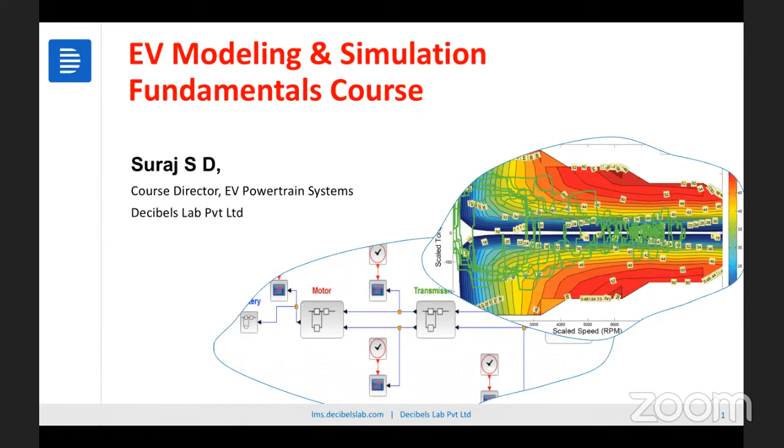Good evening everyone. Welcome to the session on EV modeling and simulation fundamentals, as a part of the 2 hours course today. It's a privilege to host all the people who joined here, and it's been a fantastic number of participants and registrations we have got for today's session - close to 1,600 people. Really impressed by the number of people who want to learn about EV systems seriously. And it's a pleasure for us from Decibels to host these free courses and bring our expertise and industry knowledge to share across these platforms. Thanks a lot for joining in, by the way.

Let's go ahead and start the session. So I will be the person, Suraj, your course director, and today's person who would be delivering the session on EV modeling and simulation.

This is the course flow we have for the session. We would start with the EV powertrain subsystems - covering what subsystems are in an electric vehicle. Why am I covering this if the session is about simulation? Because only when we know what subsystems are there does it become more meaningful to understand the simulation and its importance on these subsystems. That is why we'll have a discussion on powertrain subsystems for the first 15-20 minutes. I think people who have participated in past webinars may have already learned these things, but we want to bring everybody onto the same platform as we go ahead with the discussions and simulations.

Then we jump into why we perform simulations. I'll go deeper in showcasing a few of the areas of powertrain sizing calculations, and also the influence of certain parameters such as motors, drive cycle, vehicle weight, and so many other parameters, plus parameters such as atmosphere and how it influences the simulation, and why we need to do a simulation to do the sizing of components and things like that.

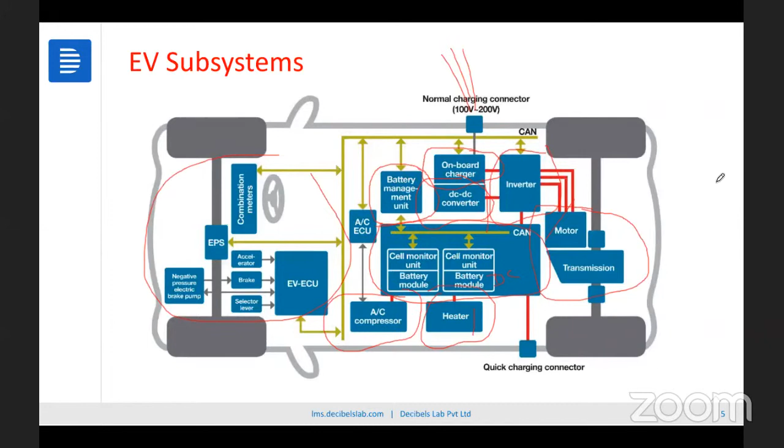Right, so a few more questions. What is optimal temperature? Okay, let's go ahead to the next part of the discussion. I'll definitely touch base on the questions which I'm possibly not able to answer now.

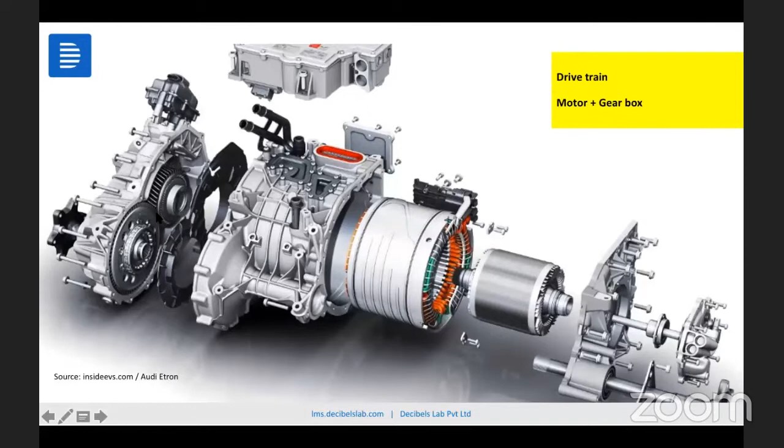So as such, of a drivetrain, we call it in electric vehicles - we call the transmission and the motor together the drivetrain in electric vehicles. Which we have seen in the last images in the presentation - the motor and the transmission integrated together. You could see the live image here, which is from the Audi e-tron, showing how the motor and transmission are integrated together, which we call the drivetrain. If you see here, we still have to retain the transmission, but it is not very big and bulky - it is very small in size.

I will quickly run through a few slides here to give an emphasis on all the components we're trying to discuss. I won't touch base on the motor technology because that is not a point of discussion in this session, so I'll focus more on the requirements for the simulation side. So if you see here, this shows why we need to consider certain parameters of the motor in simulation.

We have a lot of challenges in ensuring these requirements, but we do it with various different control methods, and also by having certain transmission requirements in place. Why do we need this information in place? Because the motor is continuously operating with respect to varied speed and load. When it is operating at varied speed and load, it is going through all these different states.

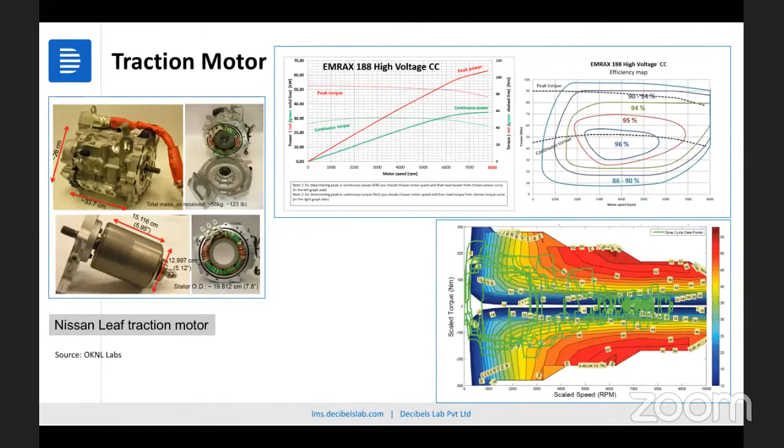And there are also atmospheric conditions in many different ways. So it's a very big challenge to have a motor designed for a traction application as a complete system. But considering that, this is why we're talking about these graphs here - I'll introduce them in further slides, where we can discuss more about considering efficiencies and how we model these systems to arrive at the right values.

So we have a very simple transmission rather than having complicated CVT mechanisms and things like that in electric vehicles. So why do we need a transmission in place?

Because if you want to directly plug the motor to a wheel, the torque requirements will be very, very big. It means that the motor also becomes very big, and as the motor becomes bigger, the size of the motor increases, and the weight of the motor increases, and also the current drawn by the motor - all these parameters will get affected.

So having a transmission would give us two leverages: to optimize the motor size and also to optimize the motor operating points, which is typically shown in the image here. So with a rightly sized transmission and the right gear ratio, you can ensure the motor operates optimally placed at its highest efficiency region. When you do that, the efficiency of the system goes really, really higher. And that's why we have transmissions in automotive.

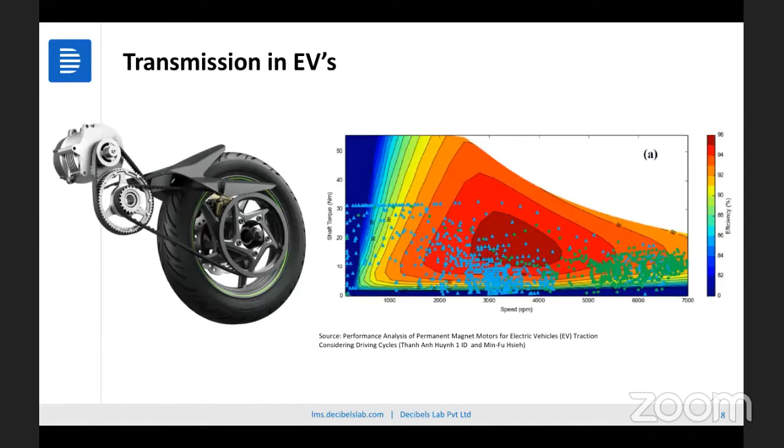So then we have the inverter. The functionality of an inverter is pretty simple, as we've discussed in the past, but it's state-of-art electronics in place which ensures the conversion of DC to AC, and also in times of a requirement of regenerative braking, we convert the electricity produced by the motor as a generator unit to other sources, such as the batteries.

So the major functionality would be to convert DC to AC that we can supply to the motor, and it also engages the control of the motor in various different ways.

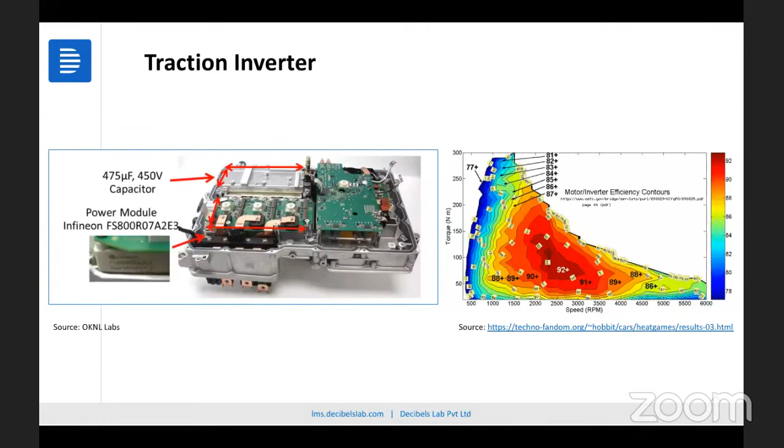Then we talk about the chargers. Typically on the powertrain sizing, we don't consider chargers as one of the parameters, but on the overall vehicle level, we also consider chargers for modeling.

As such, for powertrain sizing, we don't consider EV chargers for the modeling requirements, but at a vehicle level, if you want to consider, we would also include the EV chargers to model in the powertrain systems.

So it means that the cell characteristics are drastically affected by various situations. The meaning of that is if the temperature of the cell is varied, then the cell behaves in a very different way. If the current drawn from the cell is different at a given moment, obviously it will be different - in automotive it's a transient requirement. It means that the cell behaves continuously differently in various load conditions, temperature conditions, depending upon its age, the number of cycles it has gone through, and the way we have abused the cell. It behaves in various different circumstances with respect to how it has been used in place.

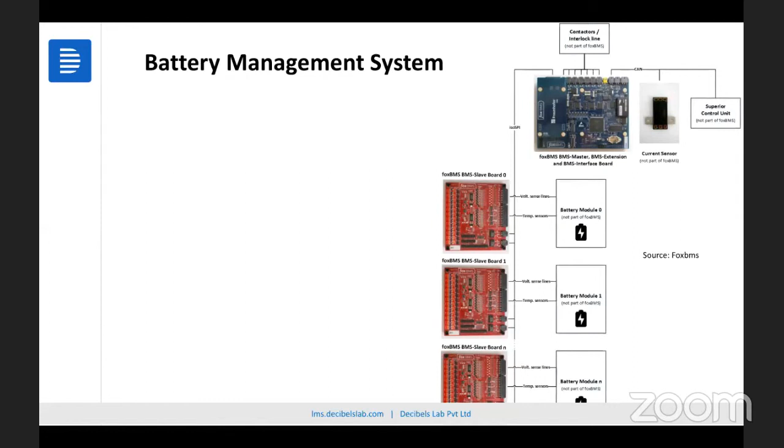So keeping all these things in place, this is a very overview of all the subsystems in EV. The reason why I was trying to put across all these systems with the graphs on the efficiency side and also the variation side is to understand how the system is varying with respect to a given minute, and how simulation will help us account for all these points to analyze and make a very analytical reason to size the components in our place.

So my question here on the screen is, why do we need to model EV powertrain? So that's the question. I'll leave a couple of seconds here for the floor to answer. I've gone through a few of the slides, a few documents which I shared across. So why do we need to actually model the EV powertrain? What would be the very important purpose of modeling the EV powertrain?

So open for questions, you can always drop in some of your answers here. Reduction of pollution. Would there be increase in efficiency by using EV planetary gear set? Okay, so economically appreciated model, maybe for the performance, weight distribution, predict model performance compared to requirements. Very interesting, good to know all of your insights on how and why we need to model the system. It saves a lot of money and time. Definitely true, it gets optimum solutions. Which type of cells efficient in EV? Great, space.

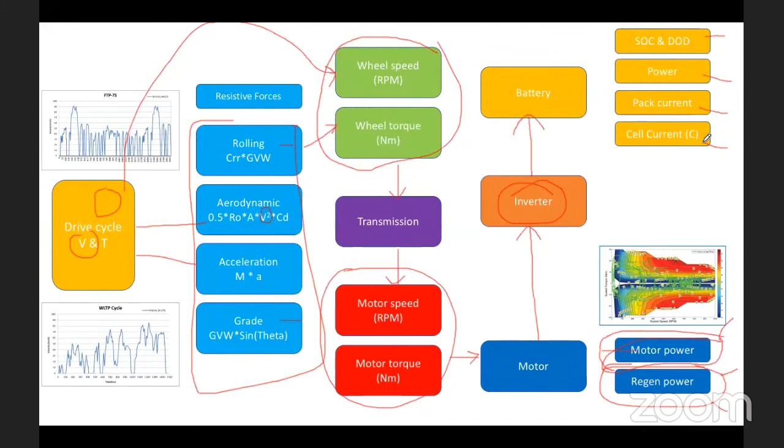Now I'll go to our next phase, where I'll be able to brief out the importance of all these subsystems into a place.

So first, why we need to model it: if you understand this dynamic system, it is continuously varying with respect to time. It means the vehicle speed is varying continuously because of the drive cycle, and not just the drive cycle, but the way we drive the vehicle, because we have varied vehicle speeds at a given moment of time. The road conditions are also different — sometimes there's an uphill or downhill condition, a hump, a traffic signal. There are so many parameters which also need to be accounted for when we are trying to do sizing calculations.

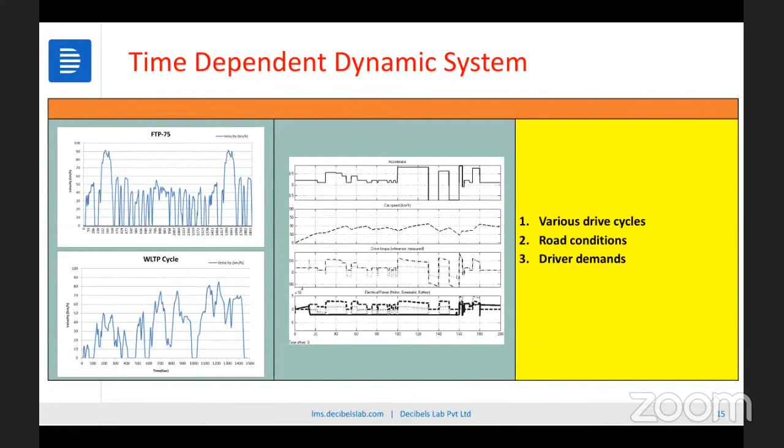Then the last one would be the driver demands — we need to understand how we want to accelerate a vehicle, or how we want to get driving requirements for our own conditions. So the whole system itself is undergoing a dynamic change at a given moment of time, which means we cannot calculate this with hand calculations, and we also won't be able to account for certain parameters. That is why we need simulation, and only by doing simulation are we able to account for a lot of parameters and get very accurate results when we talk about sizing of the components.

Going to the next slide: study the influence of parameters. This is a very important functionality, why we perform simulations. The first thing is motor efficiency.

Let's talk deeper here about the technical requirements. When we have a varied motor efficiency, as discussed in the presentation on the motor point — the efficiency of the motor is continuously varied with respect to the load and the RPM of the motor, and also changes with respect to the temperature of the motor. This means we need to account for these parameters, because if we want to do hand calculations, it becomes quite impossible to calculate the motor torque, or the motor power required at a vehicle level, which means we need to embed these continuously varying factors, since the vehicle speed is continuously varying.

With respect to that, the wheel speed is varying, the wheel torque is varying, and then we have a transmission, which then comes to the motor torque and motor speed. So the motor speed and motor torque are continuously varying, and because of that continuous operation, the motor efficiency is also continuously varying. So we need to account for those efficiencies — that's one of the very primary parameters.

And if you do not account for that, what happens? Imagine the motor efficiency is, let's say, 10% lesser. When it is 10% lesser, it means it's drawing too much current out of the motor controller, and the motor controller in turn tries to draw more current from the battery pack to achieve the driver demands. When you do that, you're basically discharging the battery more, and the battery SOC goes down faster. You could tell the customer the vehicle will go 100 kilometers on a single charge, but without rightly accounting for the efficiency of the motor across varying points, the vehicle will possibly only go 80 kilometers.

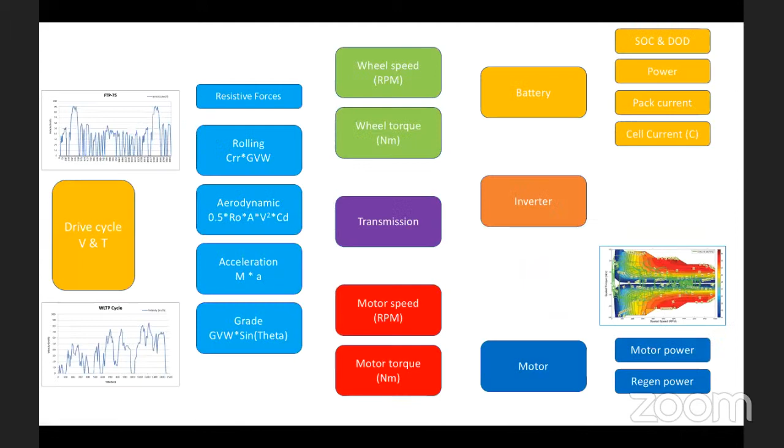Then the fourth point would be the influence of temperature. As we're discussing, the cell will behave variably with respect to the temperature of the battery pack. If the battery pack temperature is drastically high, then the power output by the battery will be reduced, and the amount of energy given out by the battery will also be reduced. So we need to consider that parameter when modeling a whole electric vehicle powertrain.

And how do we do that? As discussed in the previous model, we know the current drawn at a given time by the battery pack. We could model by knowing the losses in the battery pack, maybe IR losses and things like that. Then we can account for how much temperature can be generated at the battery pack. So when we know the exact data of the cell and how it behaves with respect to a specific requirement, we can include that cell temperature parameter and study how the battery will behave with given requirements.

Then the HVAC system, because it is again a load on the vehicle, on the battery pack - it draws a lot of current, so we need to include that. Maybe over a span of 100 kilometers of driving, you're using the air conditioning system for a certain amount of time, drawing a certain amount of current to run the motor, basically to run the compressor. So we need to account for those parameters also.

Typically for automotive passenger car segments, we're talking about 2 kilowatt up to 3 kilowatt applications of an air conditioning system. For truck and bus segments, we're talking about a 10 kilowatt or 12 kilowatt application. If you're running the air conditioning system for 1 hour, you're consuming close to 2 kilowatts of the battery pack - a lot of energy consumed just to run this air conditioning system.

So then the next one is battery cooling and heating. Why should we consider battery cooling and heating? Because to heat the battery pack, you need energy to heat it, and that energy is again coming from the battery pack itself - to heat the liquids or even to cool down the liquids.

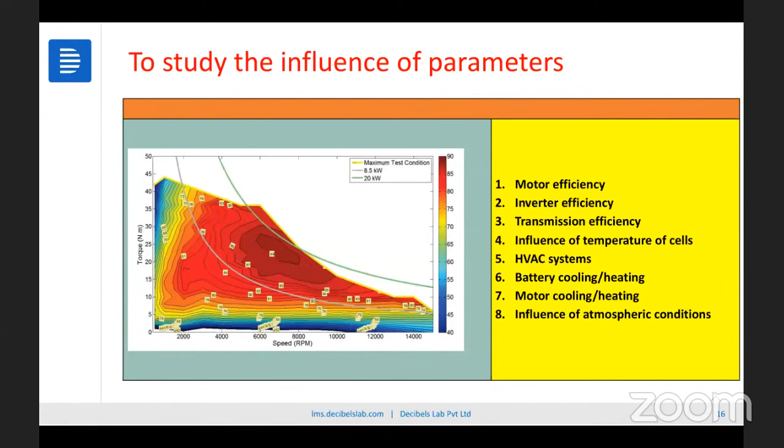That's what my interest is, to share insights on simulation and modeling, because that's how important simulation is at any given time. By having the right simulation data, you would be able to predict the system behavior in the right way.

With all this information, with all the efforts we're putting in till the last slide, what we're trying to achieve is to calculate the motor torque, so that we can tell a motor manufacturer, I need a motor of this size, in terms of its torque and its operating RPMs.

Maybe we can also define a bandwidth of operation where I'm going to operate my motor, so I want the best efficiency in these regions of the motor, and motor power and things like that. So that becomes a very crucial thing as part of this.

By performing simulations, we are able to get all these values on the motor side. On the battery pack side, because we included all the parameters, we can actually study and tell that this is the exact size of the battery pack which I require.

Imagine if you make a small mistake and wrongly study a certain parameter which is not included. Let's say the temperature of the battery pack is not included, and we did not consider cooling of the battery pack. Then when temperatures are very high, in the winter region the vehicle may give the exact same mileage, but during summer we need to cool the battery pack because the temperature is really hot, and the cooling system is consuming energy to cool the battery pack.

So that becomes a very important factor when we are doing the modeling. By having the right data of the model, by including all the parameters at the model level, we are able to calculate the exact motor power which is required.

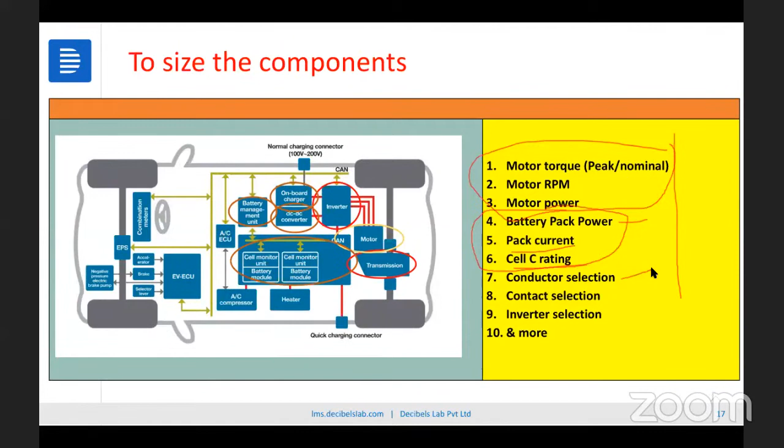You know what would be the negative torques, and then you can account for them in the motor, and you know the motor efficiencies. In the regenerative region, because the motor has different efficiencies when it is doing regeneration, we can implement those efficiencies also, and then we can actually calculate how much regenerative energy we can produce. So when you account for that, the whole battery pack size will definitely become different, right? It is not the same size of the battery pack, because you're able to actually produce some amount of energy during regeneration and store that energy back into the battery pack.

So that is becoming a very good approach in optimizing the system, because by doing that, we can tell, okay, your vehicle can give you more range. Maybe without having regeneration, possibly the vehicle can give 100 kilometers. By knowing the regeneration and exactly controlling certain parameters, we can tell, okay, maybe the vehicle can give 110 kilometers. So it has increased the range of the vehicle by 10 kilometers—again, I'm just giving rough figures. But if you study the system properly, we could optimize it in such a way that we can include and make the vehicle much better.

How can I plot this for my project? That would be a very specific question, Ritesh, we can discuss that sometime.

Why is a DC-DC converter used? I was trying to explain that. Glycol coolant is used in electric vehicle batteries. DC-DC converter is used for step down.

What is the effect on energy consumption of the battery if the motor torque and speed points are used instead of the entire plot as input? You will not be able to exactly get the right values of the current requirements. That's what happens.

How can I plot my vehicle driving cycle? There are a lot of apps available, and a lot of instruments available, Ritesh. You can buy them and keep them on your vehicle, and you should be able to plot them also.

How to rectify the exploding of batteries in EV? Oh, that's safety systems. Which cooling is preferred? It depends upon the system requirement, whether it's air cooling or liquid cooling.

How to measure instantaneous power? I was telling you about it, how we can model and get it.

Can you tell about battery life? That would be, maybe you can take another session on the cell modeling itself, Yashwant, I'll be able to tell about it then.

Yeah, there are good chances, Shubham. Even Porsche has done it using certain things. How can I connect subsystems like driving cycle, motor, and battery in a Simulink model? It's a very technical question, and maybe I don't know if I can answer everything here, but yes, you could actually do that by making certain connections between the systems. Can we charge the battery using wheel rotation in a bike?

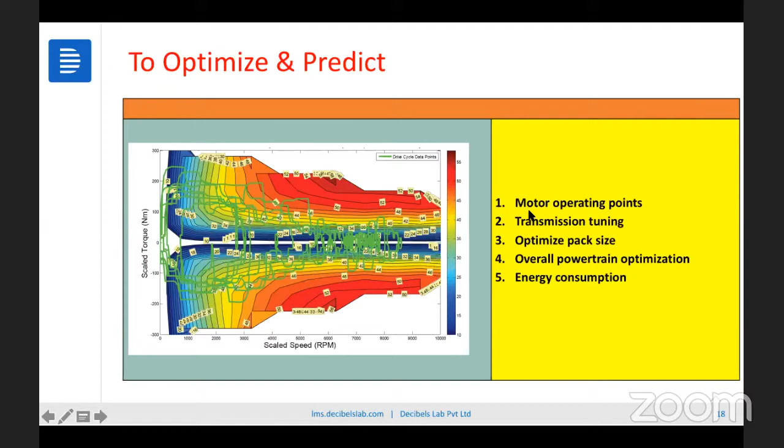We should be able to start the demonstration of the electric vehicle powertrain model which we have built. I believe it will give you more idea on the way the whole powertrain is modeled. We'll try to showcase the whole design as we have done it in the software. To do that, I would invite our simulation engineer, Mr. Bharat. Bharat, will you be able to share your screen and showcase the whole model to us?

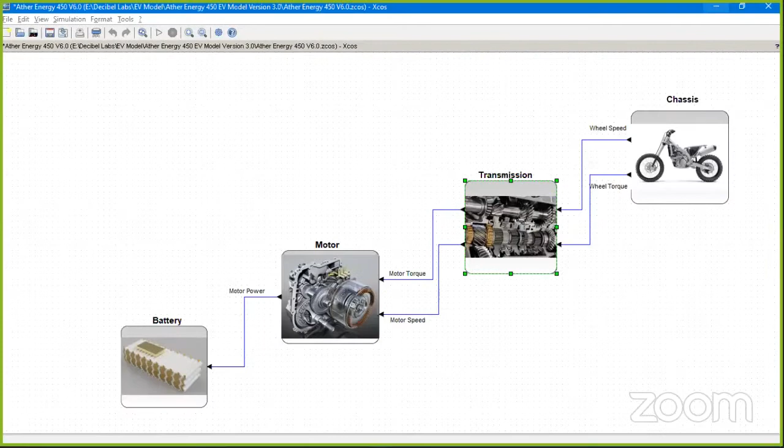Right, so I believe you all can see the screen which is shared by Bharat. Give us a second here, I'll just check. Please do confirm if you're able to see the screen, and then we should be able to take ahead our discussion in a minute. We shall start the session in just a minute, please.

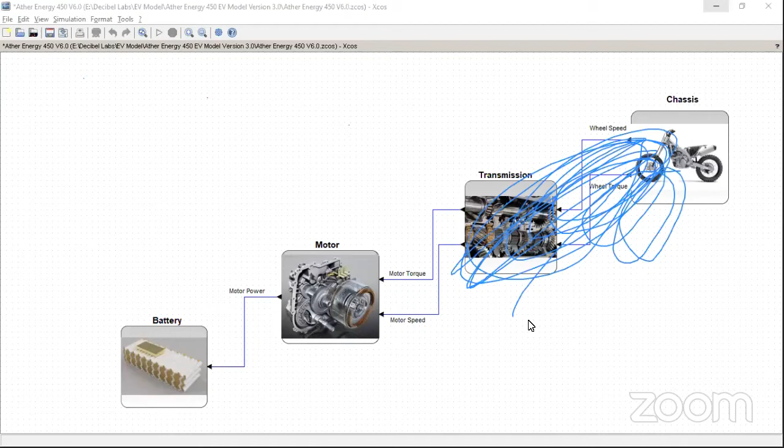All right, I think, yeah, let's get started back. So about the whole discussion which we're trying to do here. Okay, so I believe I'm audible again. We have a screen here which is visible to all of you, showing the model of the electric vehicle powertrain which we have built, which we could demonstrate on the screen.

We have used a simulation software called Scilab. We have used Scilab because it's open source and a free software available for anyone. You can download it, it's just like a 200 MB file, making it very easy to install on simple laptops and software setups.

We are also trying to help you build your own simulation model. We have a course on this, basically a 2-day course on how to build the whole model, where we teach the Scilab software, which is similar to MATLAB. There's no big difference as such, but it's simpler and easier to use. On day 2, we also teach the whole EV modeling, so you can get the graphs and outputs you are trying to describe.

It's called SCILAB. So if you could see here, this is the model data we are trying to feed. Bharat, can you double click and open this one, the Excel file?

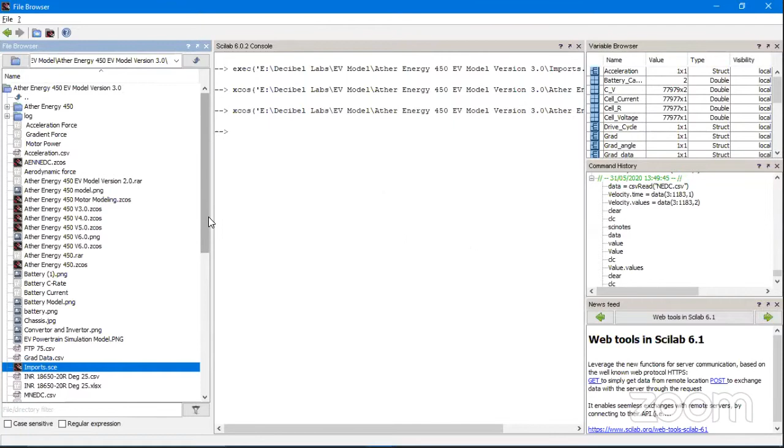This is a very complicated model, so it would take a while for you to build it. As for the data, you could see here that we are feeding different drive cycles. We call them NEDC drive cycle, WLTP drive cycle, FTP75. Depending upon each country, we have different types of drive cycles. The one we're trying to showcase here is called the NEDC drive cycle.

In the NEDC drive cycle, you can see here there's a timestamp. We are trying to take the value of a vehicle at a given time, and then measure the velocity at that time. Can we plot a graph of velocity?

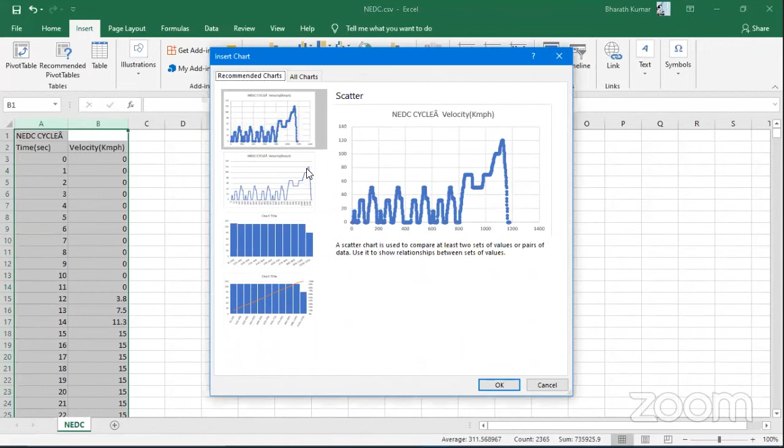So here we are trying to take the data of the drive cycle, and we are able to feed the drive cycle data. This is the way the vehicle is trying to go through a pattern. If you take a real drive cycle, the vehicle will not go like this, right? The vehicle will be going more aggressively, meaning the vehicle speed will be continuously varying. This is a very simple drive cycle.

We call it the NEDC drive cycle, New European Drive Cycle. In some cases, we use different drive cycles. A vehicle manufacturer may have their own drive cycles which they've collected, which are more realistic. If you try to design a vehicle using this drive cycle, it will consume lesser energy, but in the real vehicle you will accelerate and decelerate quite faster.

It means the vehicle will consume more energy as part of it. Now if you see on the image here, this is a drive cycle. We are trying to feed this value from the Excel sheet. This data shown in the graph is in the form of an Excel sheet, here on the left-hand part of the screen. We can close the screen, Bharat, and just scroll down the values of the data there.

You could see here we have continuously logged the values. You can also generate the drive cycle on your own. There are apps available on the internet for a paid price that will be able to calculate all the acceleration, vehicle speed, and all these things. This is the way we have the data, for 1180 seconds, and the plot of the graph is given like this.

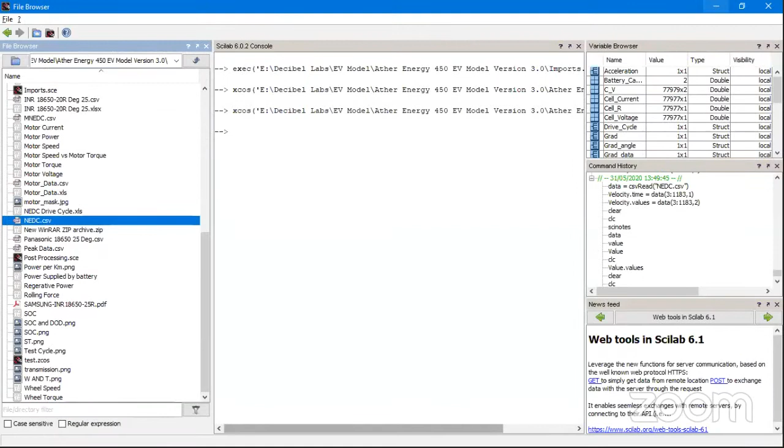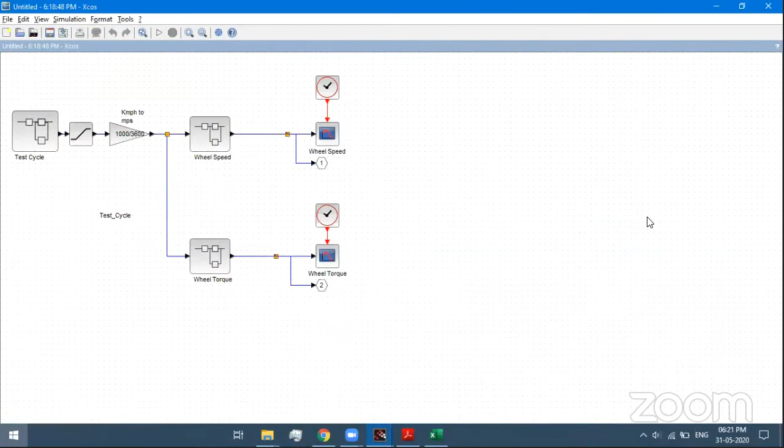You can close this, Bharat, we can go back to the model. So now what we're trying to do is feed the value of the vehicle speed, and convert that vehicle speed from kmph, which is kilometer per hour, to meter per second. Then we are feeding the data further.

If you see here, there's a wheel speed and a wheel torque. Inside the wheel speed, we can go to the wheel speed data. It's a very simple one, we can see through and do our calculations also. This is the way we have done it, there's a formula: velocity divided by radius of the wheel into 2 pi by 60.

The radius of the wheel is a constant, because for a specific vehicle we are designing, we would have imagined this is a specific wheel we're going to use. So the radius of the wheel is a constant parameter. We multiply it, and we know the test cycle because we know the vehicle speed, which we take. We multiply that and we'll get a wheel RPM. By this end, we are getting the wheel RPM of the wheel. We can close this, Bharat, and go to the torque.

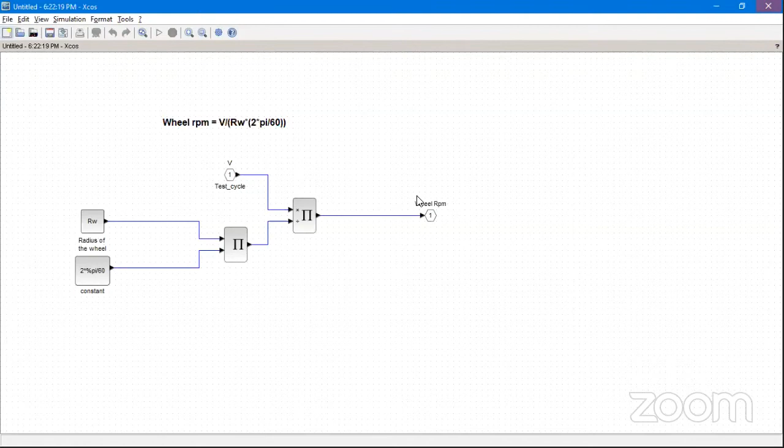The torque that has to be given to the wheel always depends upon what forces it has to overcome. Imagine there are two people sitting on the vehicle - it means more torque has to be at the wheel to move the vehicle. So we need to calculate the forces acting on the vehicle to calculate the torque at the wheel.

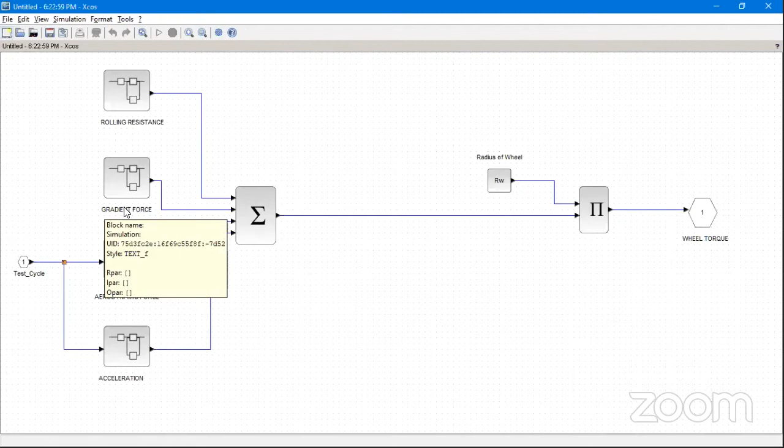Now we have seen there is rolling resistance and grade resistance. Rolling resistance and grade resistance do not depend upon the vehicle speed. At a higher level of calculations they do, but we will neglect that parameter since the influence is very small - so we're doing calculations without taking vehicle speed into account there.

Wherever we say test cycle, it means we are feeding the velocity of the vehicle to the model. For aerodynamic force, the formula is half rho A CD V square, where V is velocity. If the vehicle speed increases, the force increases too since V is squared in the equation. Deriving these equations is complicated, but simply put, higher velocity means higher aerodynamic force, meaning higher forces on the vehicle and the need for higher motor power to overcome them. That's why we feed the data into a vehicle aerodynamic model.

We can open the aerodynamic force model, Bharat, and we'll be able to visualize what is there inside the model.

I believe it is all interesting for everybody and going well as of now.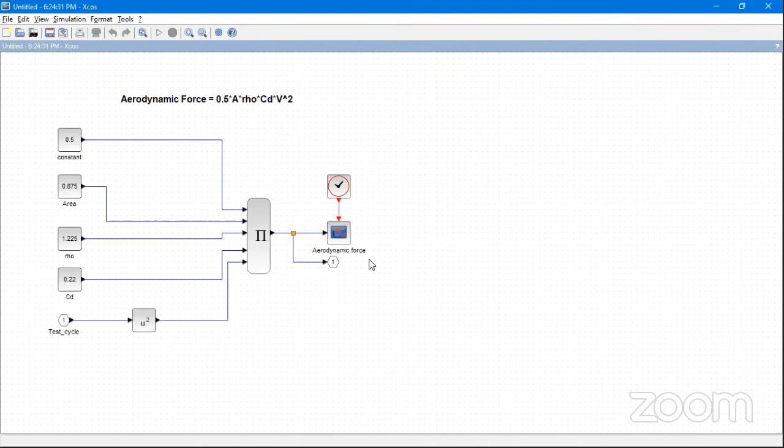We can see here we have half as a constant, then the frontal area of the vehicle, rho is the density of air, CD is the drag coefficient which we get depending on the shape from aerodynamic studies, and V is the velocity. We want V squared since the formula has V square, so we feed that value, multiply all the inputs together, and get the aerodynamic force. This is how we do aerodynamic force calculations.

Then we have acceleration. F is equal to m into a. You have the mass of the vehicle, which we know as a constant, and A is acceleration, which is the rate of change of velocity. Let's open up the acceleration part of it, Bharat.

How do you calculate acceleration? It's dv by dt - since you know the velocity with respect to time from the drive cycle plot you feed, you do dv by dt and get the acceleration. Then you multiply the acceleration by GVM - not GVW, this is gross vehicle mass, whereas previously we used gross vehicle weight - and you get the acceleration forces.

So by this we are able to calculate the acceleration forces acting on the vehicle. If you want a vehicle like a Ferrari or Lamborghini that goes very fast, 0 to 60 in a few seconds, it requires the highest acceleration. Higher acceleration means higher forces on the wheel, and those forces must ultimately be provided by the motor, meaning the motor size becomes bigger.

So acceleration becomes a very important parameter in vehicle sizing and powertrain sizing. For example, Ather claims 0 to 40 in 3.9 seconds - if they said 0 to 40 in 8 seconds instead, the motor torque required would be much lesser. But you have to beat the competition, so companies play around with these numbers. Acceleration is a very important parameter in deciding the size of the motor.

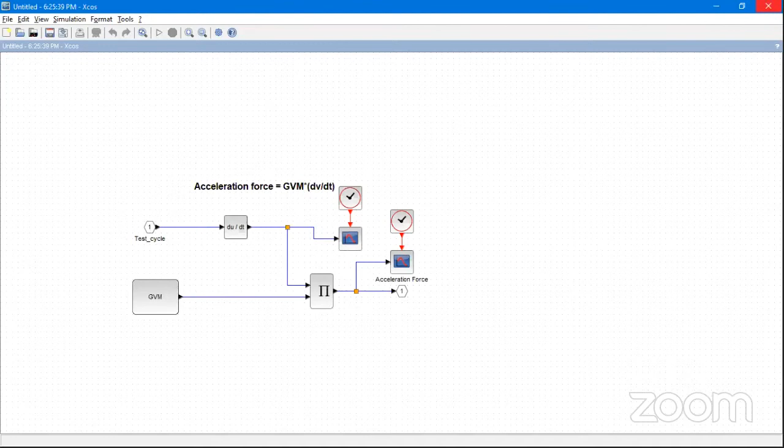In the previous screen, we were able to see all the forces acting on the vehicle, and we did a torque calculation. By knowing the radius of the wheel on the top, we multiplied all these values, summed them, then multiplied them together, and got the wheel torque. So by this way, we can calculate the wheel torque itself, and we can close this, Bharat.

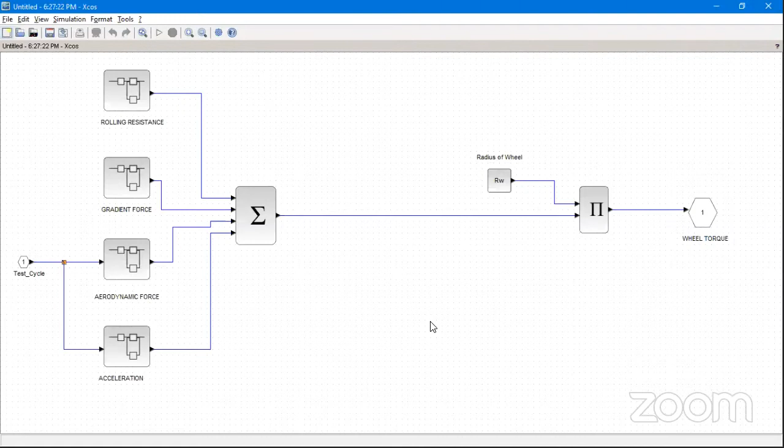So once you do a wheel torque calculation, that's where it all ends. We can close this part of it, and go to the next one.

Now with the model of the chassis, we have wheel speed and wheel torque. That is the data we could generate by having a drive cycle and certain parameters of the vehicle. We go to the transmission model. What we're trying to do here, since we know the gear ratios of the transmission, very specific gear ratios, and we know the efficiency of the transmission, by taking these values and the formulas defined over there...

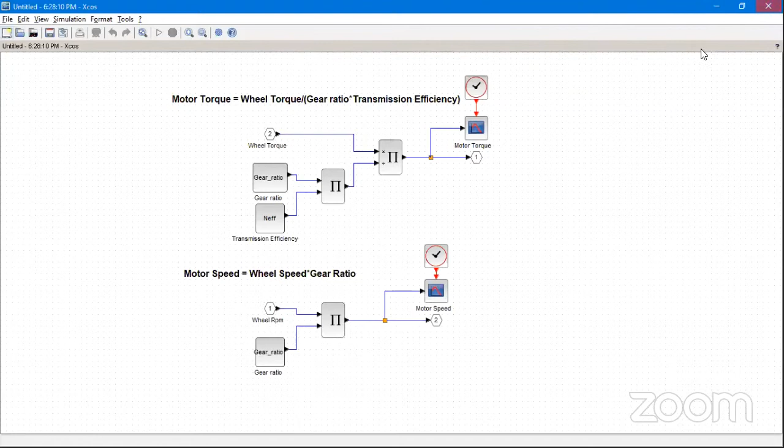By taking the values of the wheel speed and wheel torque, we will be able to calculate the motor torque and motor speed as a requirement. So we can close this, Bharat. I believe this gives you the insights on how you can calculate the component sizing.

Now the next thing is the motor. The motor is a very complex thing as a whole model. Because of certain confidentialities, it's not something we could showcase to you fully. But as a learning scope, we have built certain parameters. If you're from an electrical engineering background, you'll understand there are a lot of constants of the motor, specific efficiencies of the motor, and including all these parameters, we are able to build a whole motor model.

We're able to feed in the values of motor torque and motor speed, and then by performing a lot of calculations, and using the efficiency graphs of the motor, you can feed that in. The efficiency of the motor varies with respect to temperature, RPM, and torque. By including all these parameters, we are able to calculate the motor power.

Which is there on the side here. So we started from the chassis model, then we came to the transmission, then we came to the motor.

Now imagine we don't have a transmission. For some cases we have a hub motor, right? A hub motor means the motor will be within the wheel itself. So at that time we don't need a transmission — it gets neglected, and the wheel torque and wheel speed become the motor torque and motor speed.

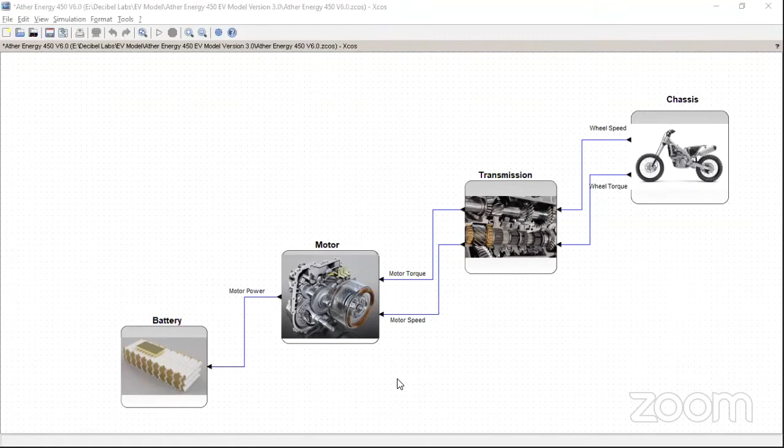Second, it becomes a vehicle dynamics problem, because you're adding mass into the rotating wheel. When you hit a hump, the suspension won't settle down very fast — there's a lot of inertia in the wheel, and a lot of problems with that. So for simple applications like motors of 250 watts up to 2 kilowatts, 2.5 kilowatts, 3 kilowatts, people use hub motors. But going higher, you definitely need a transmission in the vehicle as a requirement.

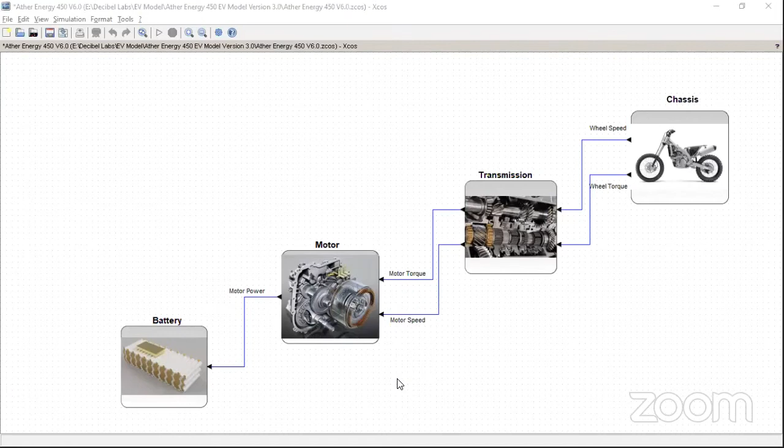So that's what happens with the motor. By having the data, we can calculate motor power as an output. Then from the output of the motor, we give it to the battery, and inside the battery pack, we'll be able to model it. Bharat, can you open up the battery pack?

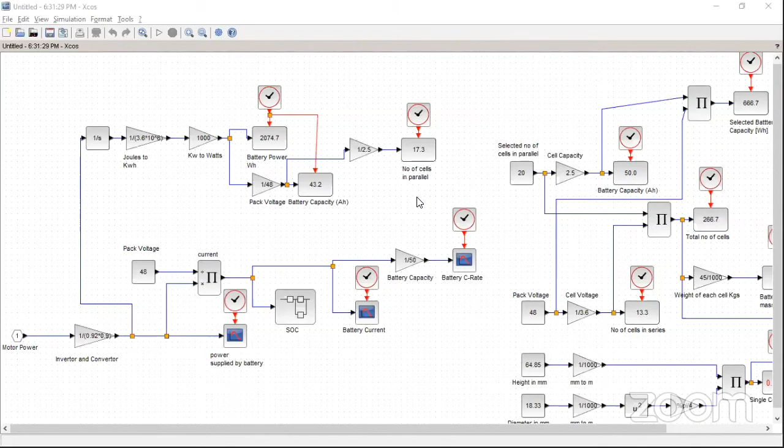With this, all the data we are able to get deeper insights on calculating certain parameters, such as the power supplied by the battery pack, and other parameters such as the battery current, and the C rating of the battery pack. On top of it, we can get the number of cells. If you know the number of cells, you can calculate the volume of the cell, volume of the battery pack, and also the mass of the battery pack.

Somebody was asking a question about how we calculate the mass of the battery pack. You can calculate it because if you know the number of cells and the power, we can do a lot of calculations, and then identify what is exactly required, and calculate the whole components of it. On the other side, we have a lot of calculations as part of it.

We can define the selected battery capacity and the cell capacity. By defining a lot of parameters, we'll be able to know the volume of the cell, and the volume of the battery pack. We can even define the mass of the battery pack, total number of cells. This gives us a complete dataset, so we can simulate and get data on what can really happen in realistic conditions.

You can close this, Bharat.

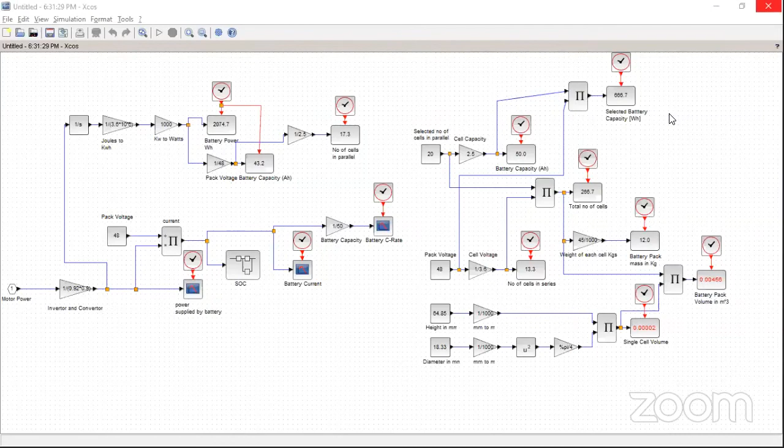So what this model gives you understanding is, I know it's not a 10 hour course to actually teach all of this. The importance is, if you know the real importance of modeling as part of it, what you can actually do, and why modeling is really required in electric vehicles, you can emphasize and bring out the importance of these modeling approaches.

With these studies, like the simple models and the complicated models, depending upon the data we have, we will be able to generate some results as part of it. But can we run the simulation and showcase some of the graphs as part of it?

So when we run the simulation, if you can see here on the screen, we have done the simulation of the whole electric vehicle powertrain. And then we are able to put across all the values of the chassis model. I'll take up the questions definitely in a few minutes.

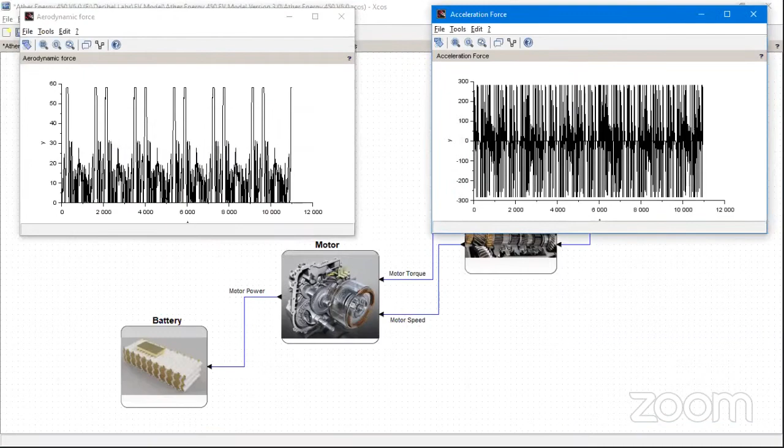So you'll be able to get all the graphs like this when you perform a simulation. With these graphs, you're able to actually validate what kind of forces are acting on the vehicle, and what is the magnitude of all these forces acting on the vehicle. You can see here the aerodynamic force on the vehicle, how it's continuously varying with respect to time because of the velocity changes. On the other side, you can also see the acceleration forces.

There is a negative acceleration, meaning the vehicle is decelerating as part of it. Now we know the acceleration forces. That's a very important detail, because if you drive the vehicle too aggressively, suddenly increasing or decreasing the accelerator, it means you're trying to draw too much current suddenly out of the battery pack, right, if you take a racing application as part of it. So at that time, the vehicle model is actually giving us information with the drive cycle.

We can actually calculate what these acceleration parameters would be, because if you accelerate too hard, the motor has to give a lot of torque at a given time. It's going to draw a lot of current out of the battery pack, and this will impact the whole battery pack life and other things.

There's a lot of studies we can also do as an outcome of this acceleration force identification. If you see at the bottom, we have rolling resistance and gradient resistance. As of now, rolling resistance has become constant because it is not a parameter of velocity. And the gradient force is constant, basically zero, because we did not consider any gradient angles like theta angles.

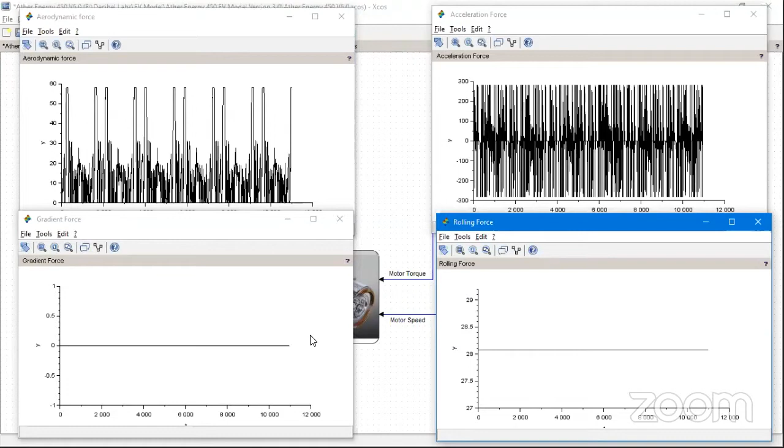So then we can close these things, Bharat, and go and emphasize more on the motor torque and the wheel torque, and the motor torque and wheel speed and motor speed.

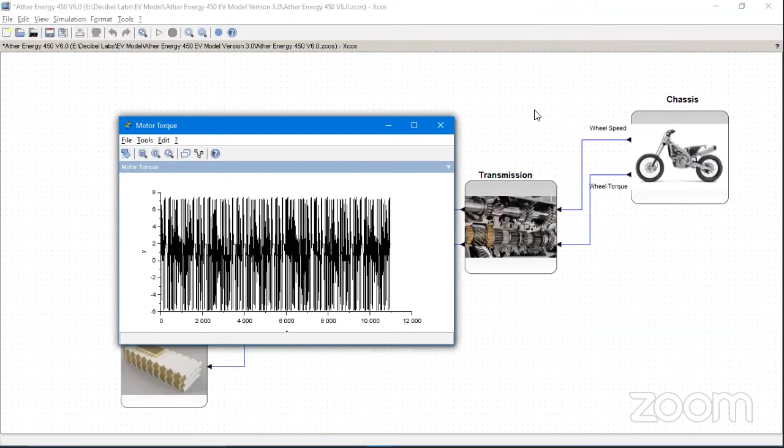This is a way you're able to emphasize and study, and for any engineer, at any requirement, it doesn't depend upon which department of engineering you study in, because when you perform these models, you're able to define what motor torque is required, what motor speed is required. I'll also have a small part of my presentation where I'll showcase how you're able to relate different departments of engineering and bring them together here, and why this is like a plant model. This is required for all learners, because from here only we can segregate and tell, okay, how much is the motor current, and all these things, if you're studying motors, batteries, and things like that.

If you are from an electrical background, you can relate the peak torque requirements of the motor and the nominal torque requirements of the motor. So by having this data, you're able to see, okay, the motor I'm selecting should have a peak torque of, let's say, around 50 Newton meter, nearly around 55 Newton meter as a requirement.

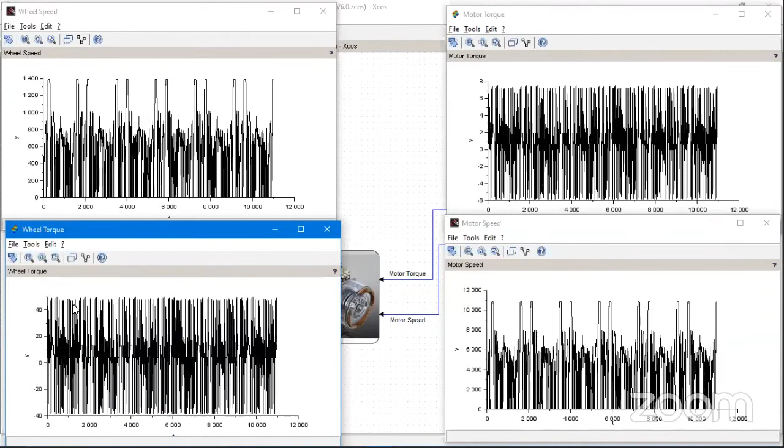By maximizing the screen, Bharat, you can visualize more deeply. So if I can try to annotate... I won't be able to annotate. Bharat, can you take the screen and point out the nominal torque regions and the peak torque regions?

Perfect, yes. So anything which is happening below that region, let's say 30-35 Newton meter, becomes nominal - under that line it's all becoming like a nominal region, but above it will be peak.

It's not exactly like that, but you can visualize it gives you an understanding of what the motor size should be. When you're selecting a motor, the motor manufacturer will have data - its peak torque, its nominal torque, and all these parameters. By having the model given to us here, it will help us understand what the right selection would be.

Right now we're just talking about wheel torque, not motor torque, but if you have a hub motor, then this will be the motor torque also. We can close this, we can go to the next one.

So now if you see here, from the data we get a motor torque and motor speed. Because this transmission is there, if you observed the wheel torque graph, the wheel torque was peaking at around 45-48 Newton meter. So if you see the motor torque here, because of the transmission we are able to reduce the torque at the motor. Since this is an Ather model, the gear ratio is around 7.8 is to 1.

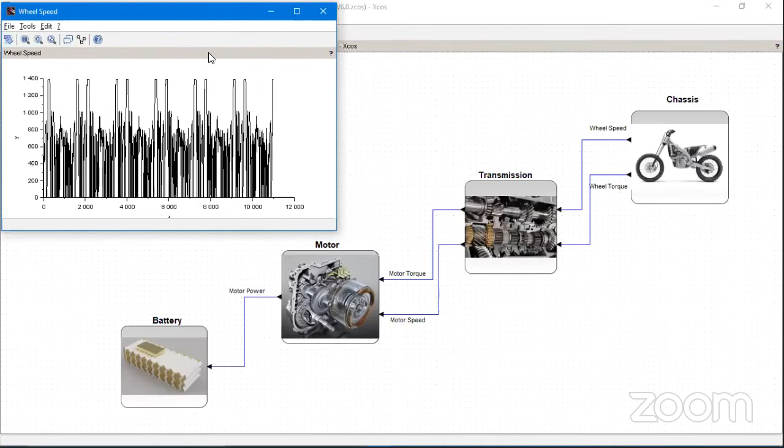We can close this. And that's the way we are able to calculate a lot of different parameters. We can just plot a few parameters of SOC, Bharat.

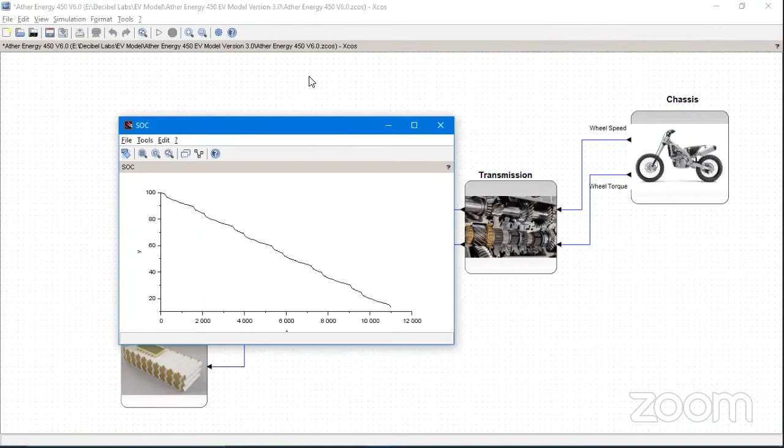Let it be there, it's okay. SOC you can plot. And then few of the graphs of cell current and other things.

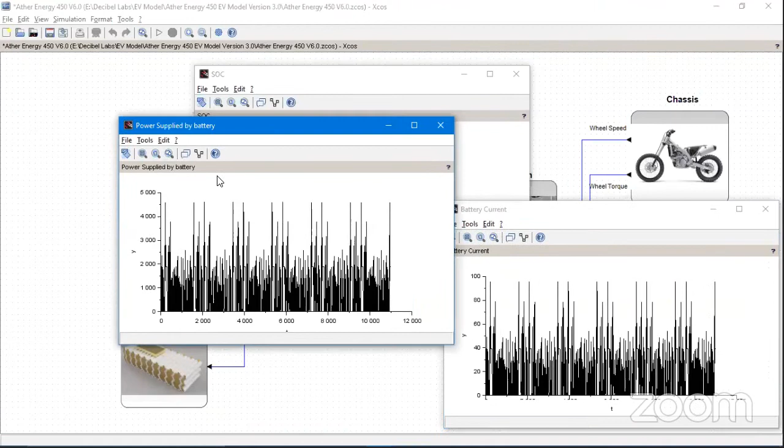So what is the meaning of SOC? Someone was asking. SOC is state of charge. It means how much energy is there in the battery pack, in the simplest sense. So when you're driving a vehicle, it is consuming energy. As the energy keeps getting consumed, it reaches a point where there is no energy in the battery pack, meaning the battery is at 0% state of charge. It's like your mobile phone, the battery icon on top of the screen showing how much battery is left.

The same way in the vehicle, by doing a simulation we're able to predict this. Actually this simulation data we have run for 11,000 seconds. The drive cycle length is maybe 12.8 kilometers nearly, in the FTP 75. So it means we have run the cycle multiple times. By doing that, 12.8 kilometers is if you run the model for one time.

So we have put multiple number of drive cycles. You can see how the SOC is dropping. Then if you include regenerative current, it means the SOC will not drop to 10%. Possibly the SOC will still be at 25%. This will be achieved by implementing advanced optimization studies as part of it.

Then at the bottom we have the battery current. Now you know what will be the peak current of the battery. As I was telling earlier, you will be able to decide the conductor selections. Like if 100 amps of current is going to the battery pack, you can even keep a safety margin of another 50 amps. So let's say 150 amps is the peak requirement of the system. It means you can select your components, select the conductors, and all the components as part of it.

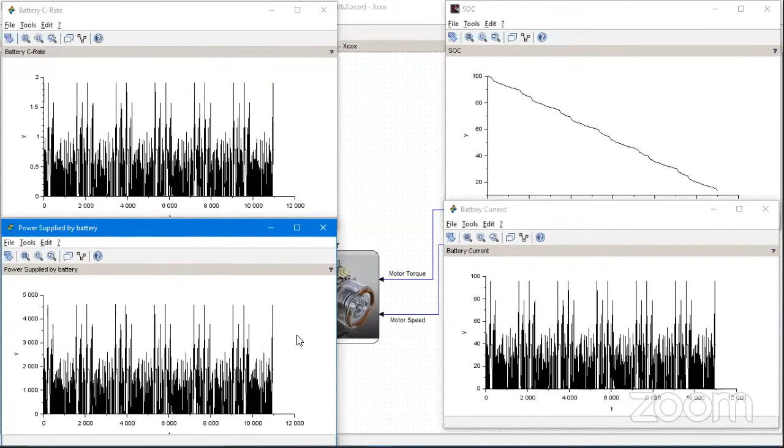You could decide upon the battery pack sizing by observing this - you can universally define it, but can you maximize the battery power? You could see and emphasize how you're able to see the whole thing. If you decide for yourself, you could say maybe a 2.5 kilowatt battery pack would be ideal for this bike. If you look at the Ather, it's around a 2.4 kilowatt battery pack.

So it means we're able to get data, because Ather hasn't given us the motor data or cell data. But still, by assuming certain values and using thumb rules from our experience, we're able to calculate data that's more accurate and realistic. The same way, you're also able to do simulations for your own vehicle applications and get data as part of it.

So overall, this is what the simulation model would be able to give you as basic insights. I believe this gave clarity on the theory session through a practical demonstration, because as I said, building a whole vehicle model is like a 2-day session. So I hope it gave you clarity.

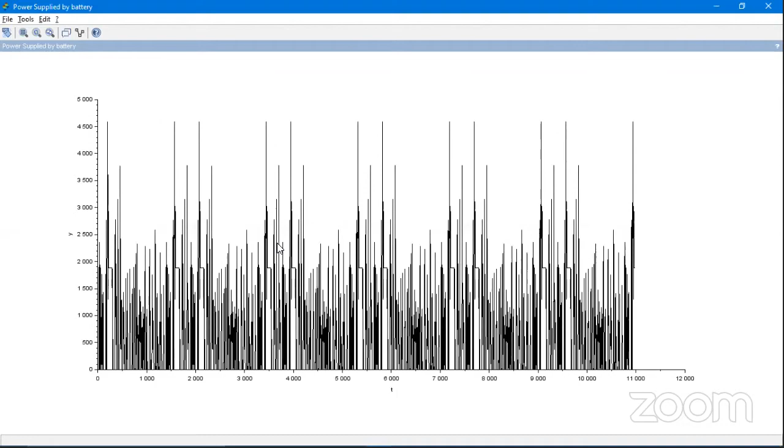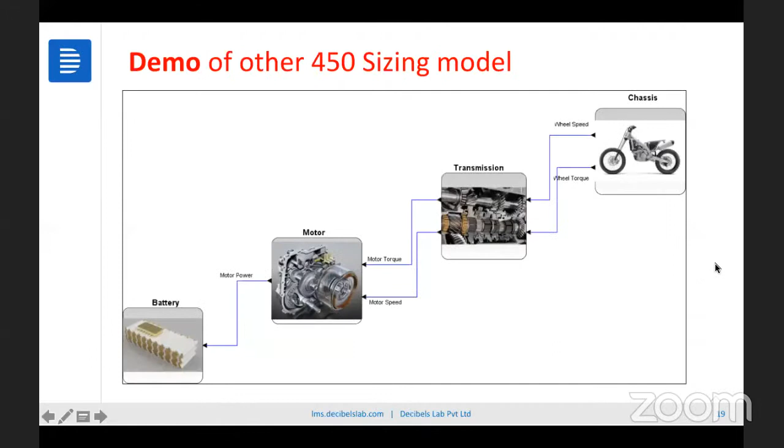So now what I'll do is go back to my presentation - you can stop the screen sharing. I'll go back to the presentation and share my screen to emphasize some more parameters of the modeling. I'll quickly run through a few more things. I believe that gives you an idea of how the modeling works, why modeling is important, how we do it, and its emphasis.

So with that part done, I'll move to the next things. Modeling isn't just about vehicle modeling - there are subsystem models also which we need to model, and there's importance to those subsystem models too.

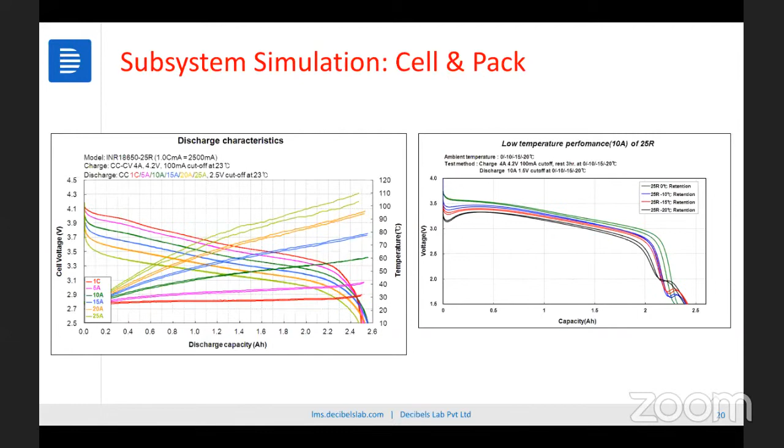Then there's another complexity of modeling cells in another way. What I mean is there's a different division where engineers work in cell modeling. Why you do cell modeling is because, for example, you take a cell and use it for 5 to 6 years or 10 years in the vehicle. If you want to tell the customer what happens in the 6th year,

in physical terms, it's like when he has purchased the vehicle, it gives him 100 kilometers in the first 6 months. But after 6 months, maybe it only gives him 80 kilometers because the capacity of the battery pack has been reduced. The energy storing capability of the battery pack might have been reduced, and by the end of the 5th year it has drastically reduced. But how do we predict whether it happens in the fifth year, fourth year, or third year? How much does it happen? What parameters are really influencing this battery pack or cell?

All these things we are able to study only when we do modeling, because if you take a cell and study it for 5 years, it will take a long time. By that time there are already so many vehicles in the market beating the competition, so you won't be able to do that. That's why we do cell level modeling, where we run simulations for many seconds and check how the cell will behave, and we can improvise a cell model.

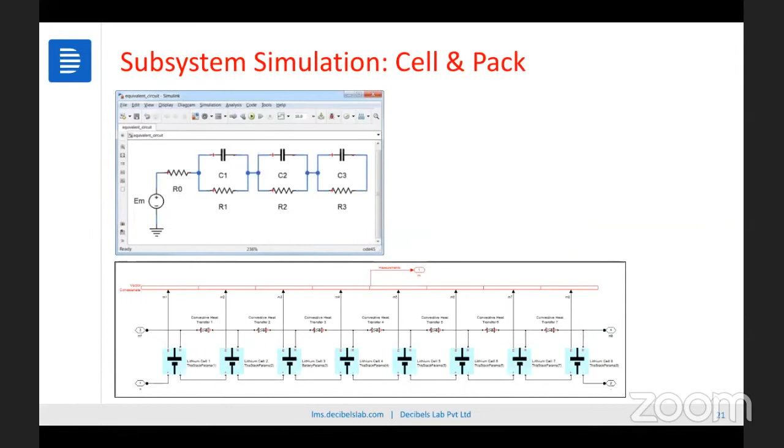And when you improvise a cell model, you can implement it into a BMS model, which I'm showcasing here on my screen. You can implement it to the BMS, and then the BMS can be studied for a lot of parameters. The algorithms can be developed using the cell model. This is actually the industry approach, the way people do embedded coding for the BMS, what we call algorithm development.

They build a model in MATLAB, and they can export that whole model into C code using tools like MATLAB Embedded Coder. That's when they can implement it to the BMS and study all the parameters as part of it. It means the simulation is not just a vehicle simulation, it's also extended into these areas. I'm trying to emphasize how much importance simulation has.

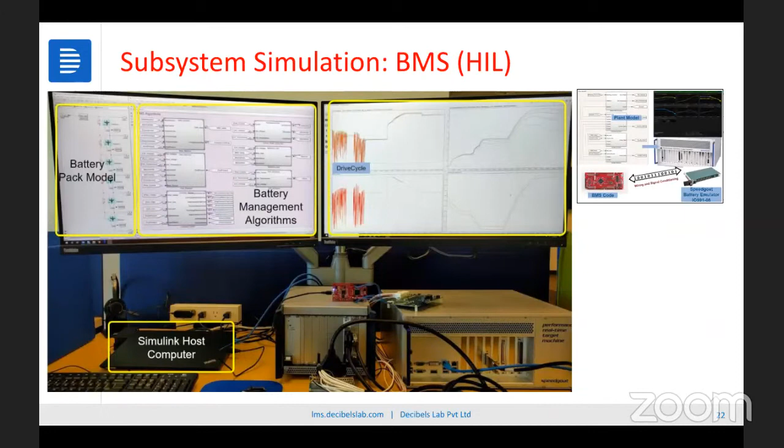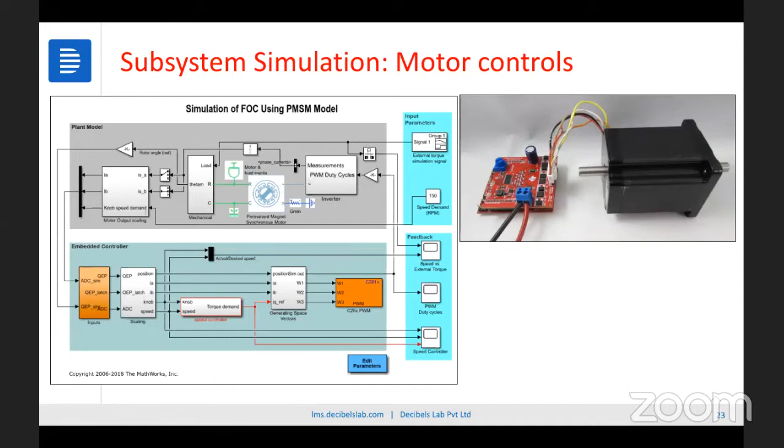And even in motor controllers, we can develop all the motor controller algorithms in MATLAB and implement them in the controller, testing them even without having hardware. And with hardware, you can do HIL testing and things like that.

So if you understand the overall part of it, why do we perform simulation? Simulation saves a lot of time for us, because we can't afford that much time in real-time testing. Even though real-time testing is more accurate, the problem is the time and money it takes, so that's not possible. We have to adopt simulation approaches to study the parameters and advance as fast as possible, running many test cases.

If you want to run test cases for the cell, it means you need to have a cell, and that is going to cost. There are a lot of dangers also. You need to have equipment, you need to have a lab technician, so many things are there. But with simulation, you can just run it without having that hardware and all these things.

If you put across all these things, it is not just vehicle modeling. Engineers are required at every level: cell modeling, motor controller modeling, DC-DC converter modeling, even charger modeling, vehicle grid modeling. It means modeling is the first step every industry starts at, and that's how much importance modeling and simulation softwares and tools have at the requirements of the industry.

And that's where I could bring out a small part of the conclusion, which is why simulation is so important and why you engineers have to learn about simulation and advance yourself in the areas of simulation too, which Decibels definitely helps with.

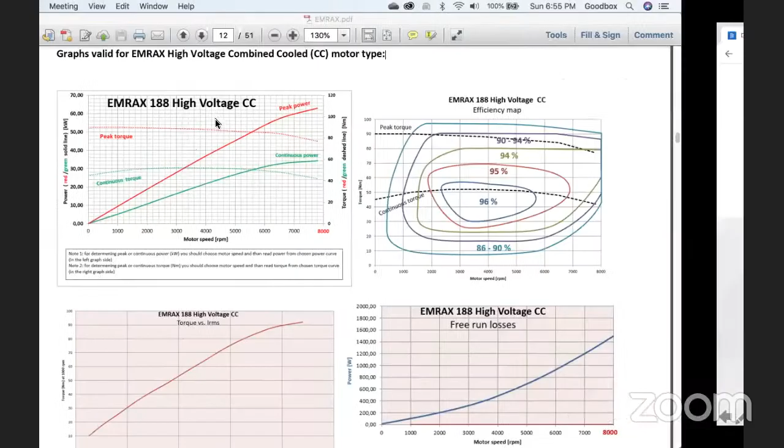This is a course which I've attended, and there's another course coming up for learners, about a 4 week span, teaching cell modeling and also BMS modeling, with vehicle modeling also included as part of it, which is a very advanced course at very affordable prices.